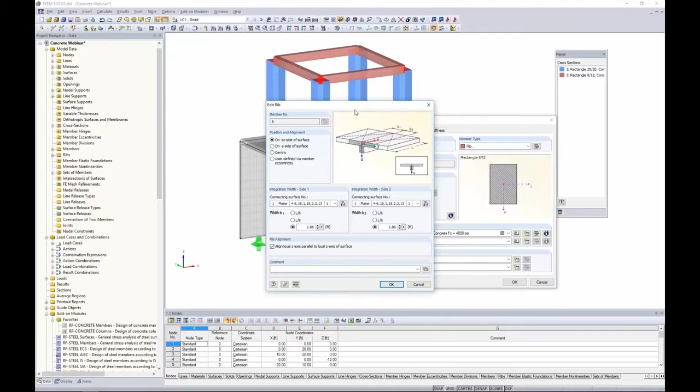And what's nice about the rib is that if we go into the Edit Member Types dialog, we can define where to exactly place the orientation of this rib in comparison to the surface it's related to, so we don't have to manually put in rigid links to drop it down below the surface. The program will automatically calculate that for us.

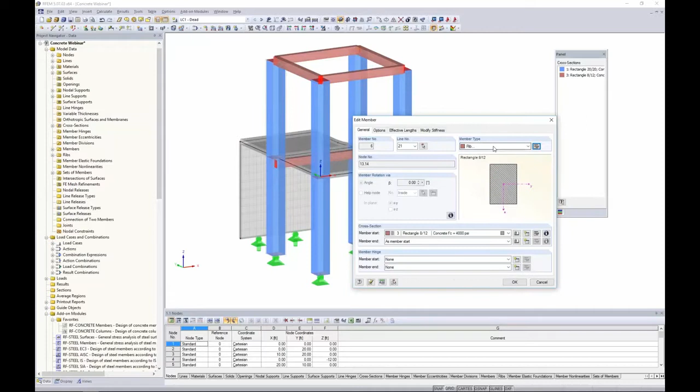Now what we can also do is automatically set the effective widths: L over 6, L over 8, or we can enter a user-defined option. So it's nice that the program has this member type as a rib, which is used quite often for concrete members.

You can see here that I've already defined all of this criteria. The last thing to notice about these members is that if I take a look at these columns, for instance, I right-click and go to Edit Member. Under the Modify Stiffness tab, this is something that needs to be done for concrete members. Typically the default will look like this, definition type none. What you want to do when designing according to ACI is select the drop-down according to ACI 318-14.

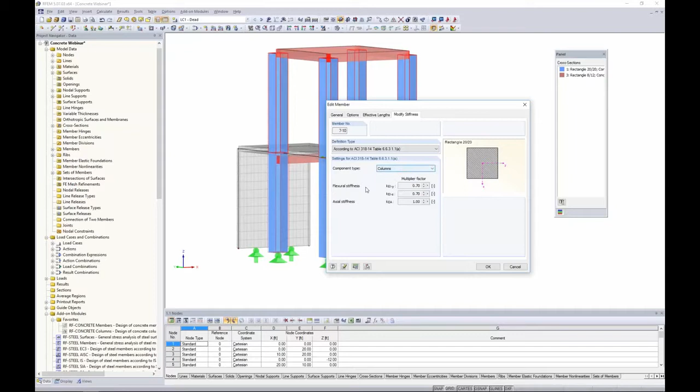If you click on this, it should look familiar. We have our component types: columns, walls, beams, and flat plates. Then you'll see these multiplication factors for our stiffness to take into account cracked cross sections. Anyone who's done concrete design is familiar with this. This is the way to take it into account in the program.

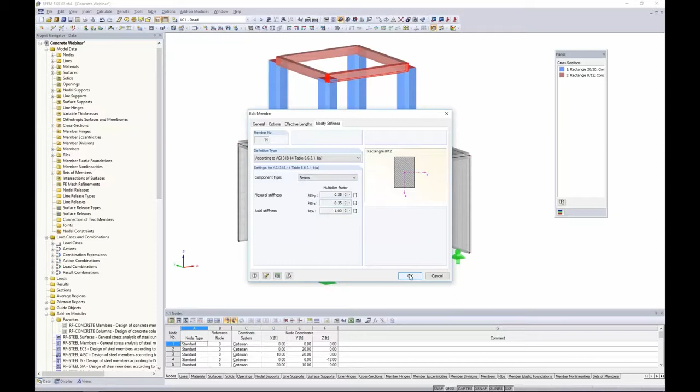For our beams, for example, we have the exact same setting according to ACI, but I've selected beams here. This multiplication factor will be slightly different than what it is for columns, which is why we give you this other drop-down box to define the element. So remember to do so for your concrete design. This isn't done in one of the modules, it's actually done in RFEM.

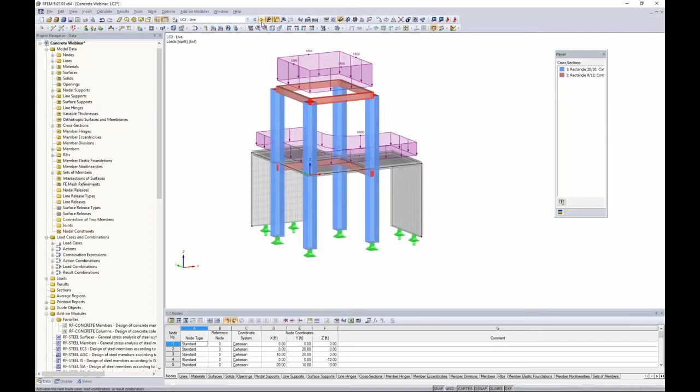The other thing to notice is that I went ahead and applied some loads already. We have our typical dead load, surface load here. I put some line loads at the top members, same thing for live load. Lastly, I put in a lateral wind load, applied as a line load to what we can call our first level diaphragm, as well as our second level, on these beams.

We can also take a look at our different load combinations that were generated. If we go into the Load Cases and Combinations dialog box, we'll see our different load cases: dead load, live load, wind load. More importantly, we're interested in these load combinations, which were generated according to ASCE 7. We have all of our LRFD load equations listed here, applicable only to those load cases we defined, and we also have our ASD load combinations listed.

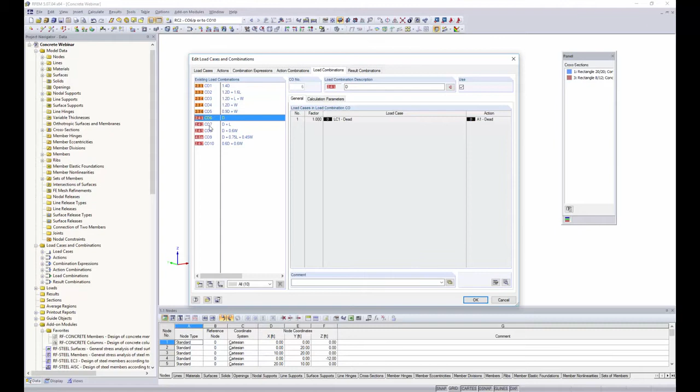Something to note: it is default in RFEM to run these load combinations as second order analysis, or P-delta. You can individually change these to something such as linear analysis or large deformation analysis if you have things such as cables. But for now we want to keep it as P-delta effect so that we are doing our member design according to P-delta. We also have the results combination.

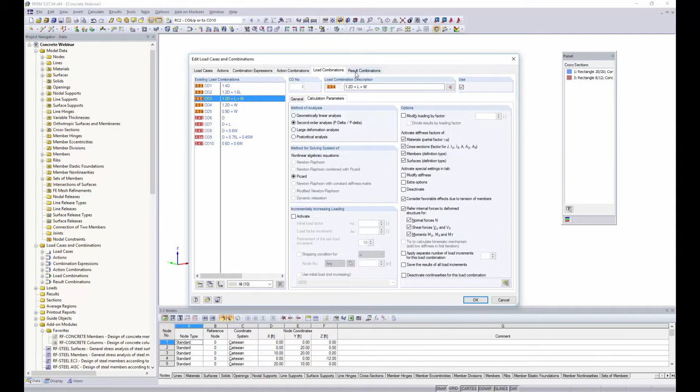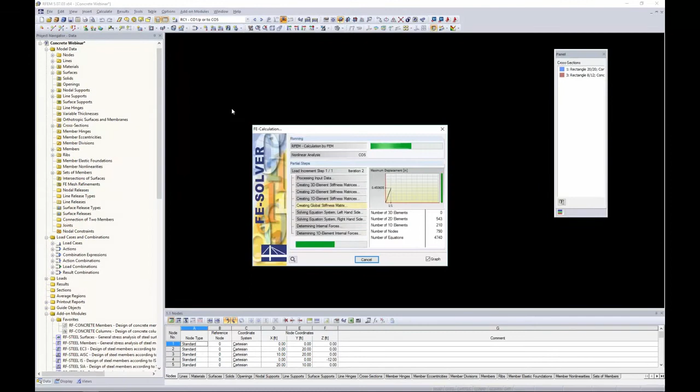This is nothing more than an envelope solution. You can see that we have the envelope solution for all of our LRFD equations and the envelope solution for our ASD equations. With that said, we can go ahead and run our first analysis with result combination 1. You'll notice this is nonlinear analysis, as I was saying, it's P-delta. It solves rather quickly, and we are given the envelope solution for all of our LRFD equations.

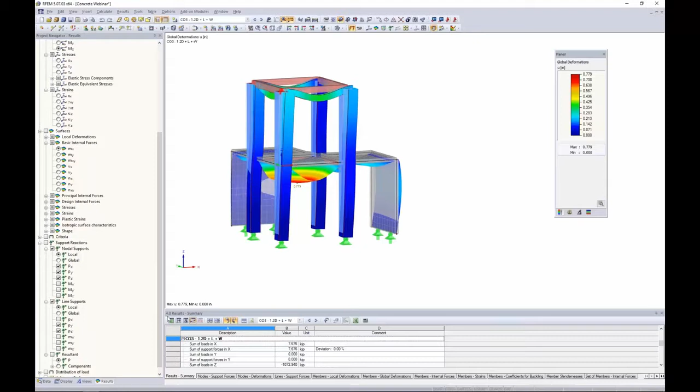Our results tab popped up here. This allows us to view our members, and I can turn this into wireframe mode to see our member internal forces, such as normal forces for our columns, or maybe shear forces and moments. We can always increase this diagram to make it a little more visible, and you can print this off. So everything according to our analysis is complete.

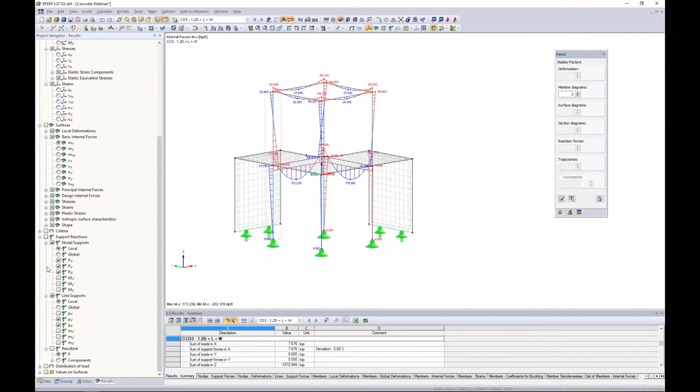Support reactions is something else that I mentioned you can easily show. I just have some simple pin conditions, and some pinned conditions at the bottom of our walls as line supports as well.

So that's basically the extent of RFEM. Now for concrete design, this is where our add-on modules come into play.

The first way to access these add-on modules, there's a tab up here called add-on modules. The options are a little bit more clear here in this list. Steel are grouped together, concrete are grouped together. So I could certainly access them through here.

Back on our project navigator, on the data tab down here at the bottom, this is our long list of add-on modules. You can always right-click and add it to your favorites to move it up to the top of this list. I prefer to access it through here only because it's a little bit quicker than going to that drop-down, but it's completely up to you.

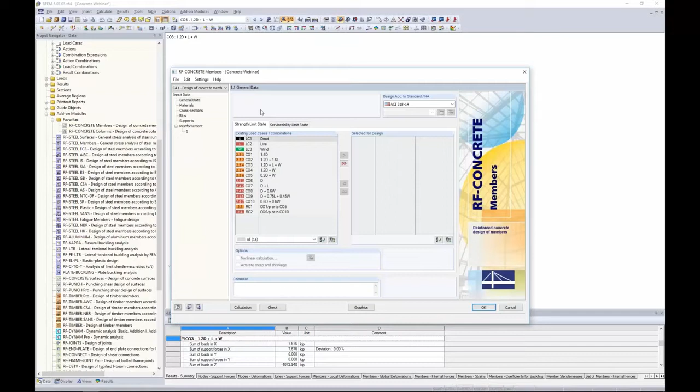So the first thing that we want to do is jump into our RF Concrete Members. Something to note here, this is our add-on module.

And when I say add-on module, avid RFEM users are used to this dialog box, but for others who aren't familiar with our program, this is just a simple dialog box within RFEM. All of the materials, the cross-sections, the loading, everything is taken from RFEM into this dialog box or add-on module, so you don't have to worry about redefining any of that information. The add-on module is purely used for code design.

You can see here that we have design according to ACI 318-2014 selected. Now the first thing the program asks us is what load combinations do we want to select for our strength limit state.

We will probably use our LRFD equations for this scenario. That's pretty common. Now for serviceability options, we will choose our ASD load combinations. That's typical as well for crack widths, and for deflections we want to choose our ASD load combinations.

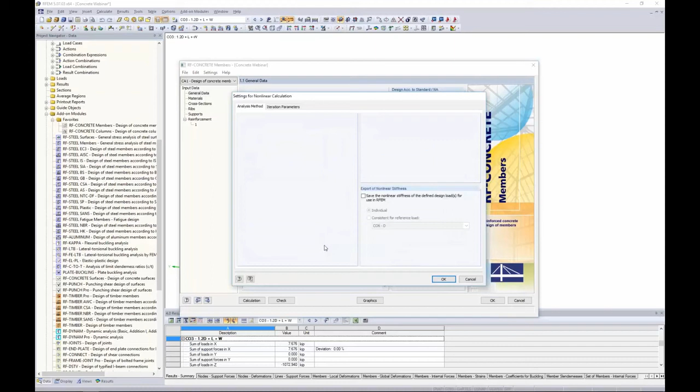Down here under our serviceability, we have nonlinear calculations. This is if you want to take into account creep and shrinkage. I'm not going to get into this today, but this does require an additional add-on module, Concrete Nonlinear. So if you want to take into account cracked sections with creep and shrinkage, this is certainly an option here, but I won't be getting into this today. We will just be sticking with the typical linear elastic analysis.

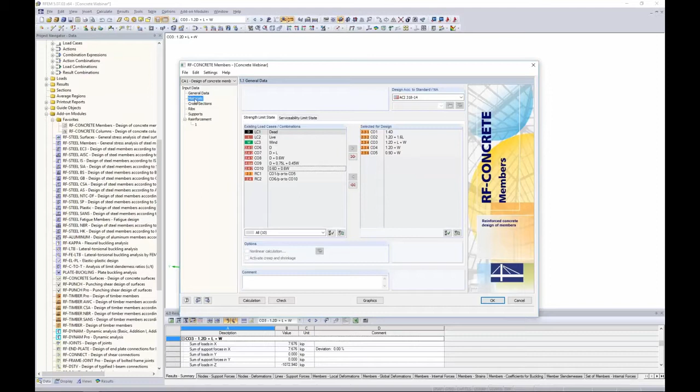Materials: as I mentioned, our 4000 psi f'c will be taken from RFEM. We have reinforcing steel grade 60. You can view the diagrams here for stress-strain for both our concrete and our steel. All of the parameters are given here.

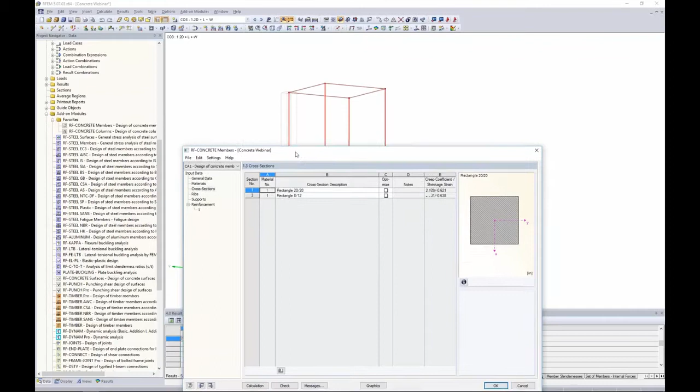Cross sections: we have the cross sections taken from RFEM. Let me exit out of this and turn this back into the rendered mode. Going back into the dialog box, I just wanted to show you that under our cross sections, it's nice because as we click on these different table rows, the members that are applicable to this particular row will highlight in the RFEM model. So everything is synced together.

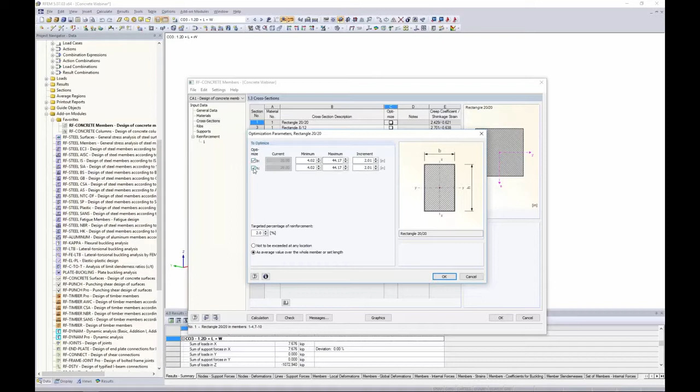We do have the option to optimize. If this is something you want to consider to get the best design, the most economic design, all you need to do is check this checkbox. You can see that we have the option here to optimize. You can set target ranges for your width and your height, B and H. You can also set a target percentage of reinforcement.

Sorry, I'm just double checking one other thing.

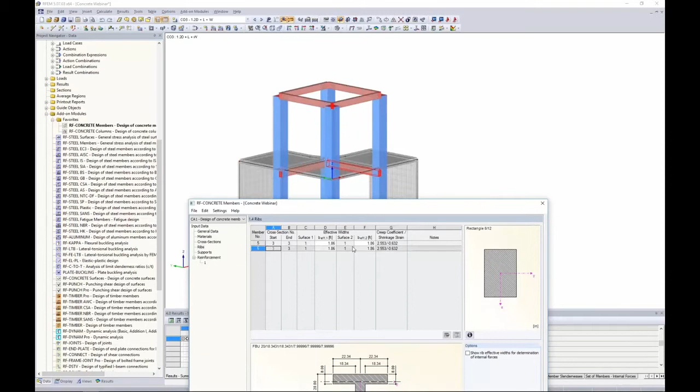Okay, now moving on down the list, we have our ribs cross section. This is the ribs category. You'll notice it highlights as I scroll through these different members back in RFEM. This is the ribs that we defined at the beginning in RFEM that I was showing you. The effective width is taken into account, how we set it in RFEM. You can always override this directly in the add-on module as well.

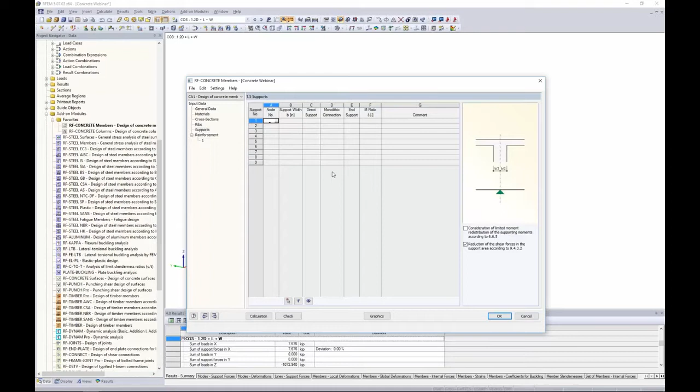Supports is something important because in the code, when we're doing something like shear design for example, the code says you can take the required shear force a distance of d away from the face of the support. Now in RFEM, and this is true for any finite element analysis program, members are just 1D member elements. They're modeled by their center lines. So we have no idea what the face of the support is.

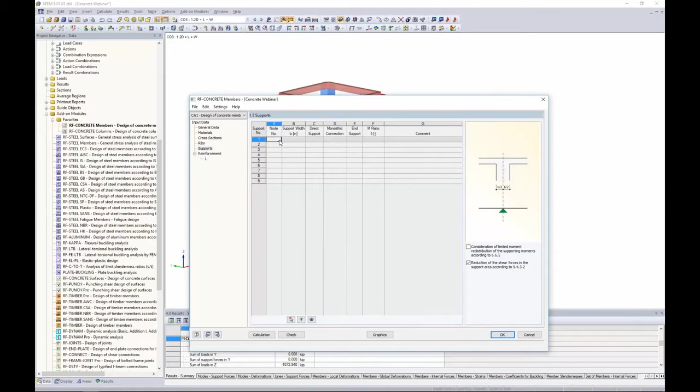And what's great about this add-on module is that instead of maybe over-designing for a shear force that is much too high, we can specify these particular supports. All that I need to do is maybe start with these nodes up here, and I just highlight. You'll notice these 4 nodes are now highlighted in red. I click OK, and they're all available in this list here. Take note of this picture.

As I change things within this table, this picture will automatically update. So, support width—our columns have a width of 20 inches, so I'm going to set my support width to 20 inches. For avid RFEM users, you may not be aware of this, but if you press the F8 button, it will quickly fill in these cells according to what was previously entered.

Direct support—this is self-explanatory just by looking at this picture. If I unselect this checkbox, this shows me that the beam is framing directly into that support. If I check it, it looks like it is a continuous beam resting on top of that support. For our case, we'll keep this as a direct support. Monolithic connection—is it one concrete pour or two? Again, shown by this picture.

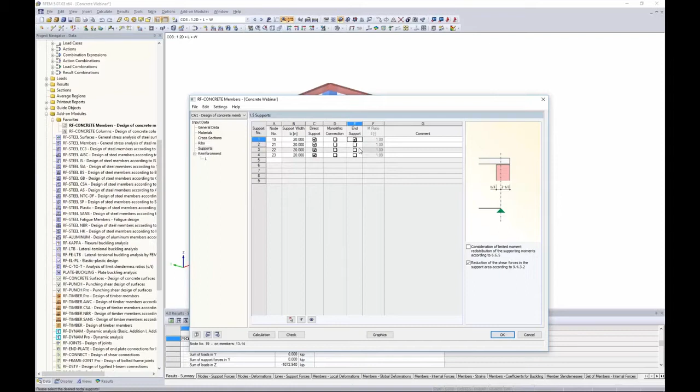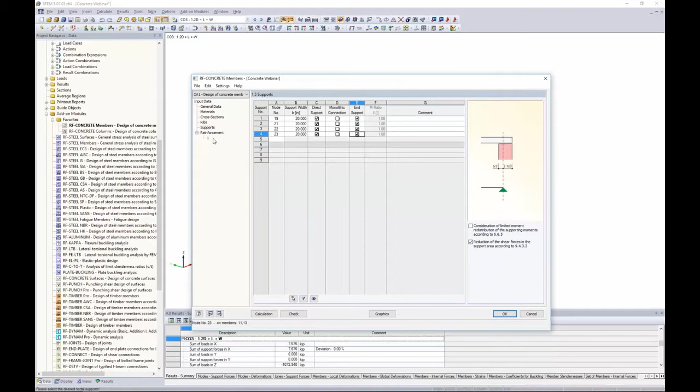End support—is the beam continuous over the top of the support, or is this an end support condition? For our options, our supports are an end support, and you'll notice the red arrow points to which node number I'm looking at. Again, this is great for large models—I don't have to guess, oh, I don't remember what node 23 is, go back into RFEM. Everything is synced together. So now we jump into reinforcement.

This is a little bit more lengthy than the other options we've seen so far because we have a lot of code references and things to take into account according to the ACI for reinforcement design. The first thing the program asks us is if we want to define more than one reinforcement group. This is important if you have a lot of members, since of course they're not going to have the same reinforcement layout. So you can create as many groups as you'd like and give them different description names. For us, we just have one description that we'll define here.

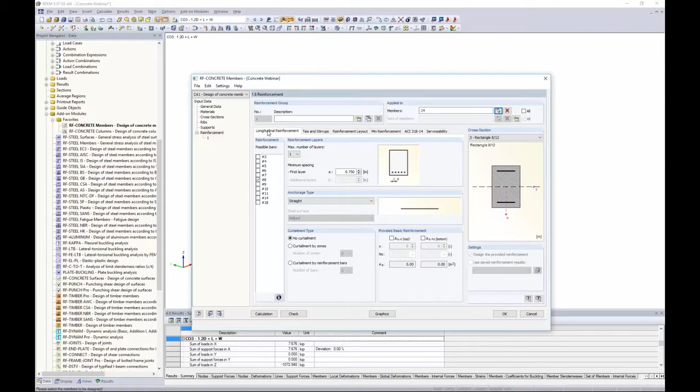Applied to which member—if you have many different reinforcement groups, you can apply them to different members. For the purpose of this demonstration, I'm just going to select one member for design. Then we jump down to our first tab, longitudinal reinforcement. What bars are possible for our reinforcement design? Let's say I want to choose maybe 5, 6, and 7 here. I'm not really sure exactly what will be needed, but we'll start with something like that.

Max number of layers—this is pretty self-explanatory. If I want more than one layer, as you can see here, it's possible. Probably more important for larger beams when you're taking on larger loads. For our case, we will just have one layer.

Something else I'd like to point out is the minimum spacing for the first layer. We have a user-defined entry here, so we can refer back to the code—this is chapter 25. The minimum spacing for our longitudinal reinforcement must be the greater of the values of 1 inch, the diameter of the bar, or 4/3 times the diameter of the aggregate. I have no idea what the diameter of the aggregate is—probably as an engineer you might know that information, so you'd want to take that into consideration, but we do not have an entry for that in the program. One inch will probably be controlling here because I do have smaller bar sizes under a 1 inch diameter.

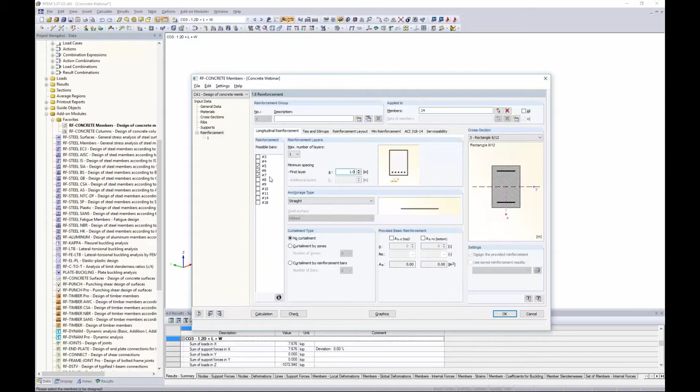Anchorage type—so anchorage and curtailment, I'll talk about in more detail here. The anchorage type—we have every different option you could probably consider, and it's updated with this picture. You'll notice we can take into account transverse bars, or maybe we just want a typical hook. For us, we'll keep this as straight. Steel surface is grayed out because the code does call that all steel surfaces must be ribbed.

Curtailment type—curtailment is something that maybe some of us aren't familiar with the term, others may be. So with that, I'm going to jump to my PowerPoint here and discuss what curtailment is, and a little bit more about our anchorage development lengths.

Curtailment is where we can reduce the area of our flexural reinforcement along the length of our beam because we have a lower bending moment there. What this means is that this is going to save us materials and in turn save us money. It is an option in the program to take into account, and I'll show you in just a minute how to do that.

So the other entry we need to consider that RFEM is doing in the background is the development length. The program knows whether the bars are in tension, compression, or if they're a standard hook in tension, and it will refer to code chapter 25 for all of these varying equations to make sure that these development lengths are correctly taken into account.

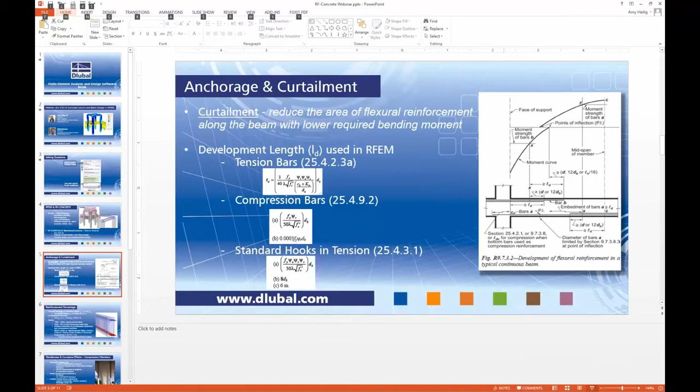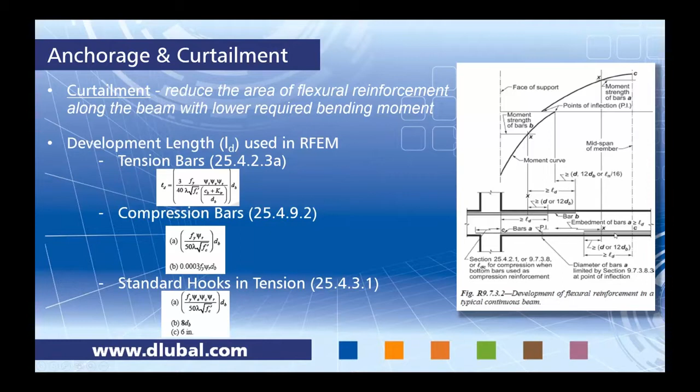And back in the PowerPoint, this is just taken directly from the code, figure 9.7.3.2, and this is exactly what we're talking about. Probably towards the face of a column, we have more of a negative moment here. We have a very low moment in between here, so maybe we don't need as much reinforcement. This would be a situation where curtailment could be used, and then obviously we're getting into higher positive moments towards the middle span of the beam, which will require reinforcement on our bottom. Okay, for our case, we'll just leave it to no curtailment.

Provided basic reinforcement. This is great for structures that are already existing. Maybe you already know the top and bottom area of steel. Here you can actually set that by just defining your number of bars and the bar diameter, and the program will automatically consider this as provided basic reinforcement. If this reinforcement does not meet the needs of what the design is calling for according to the ACI, the program will tell you, well, okay, we are considering this provided basic reinforcement, but we also need to add additional bars in order to meet the requirements of our bending moments.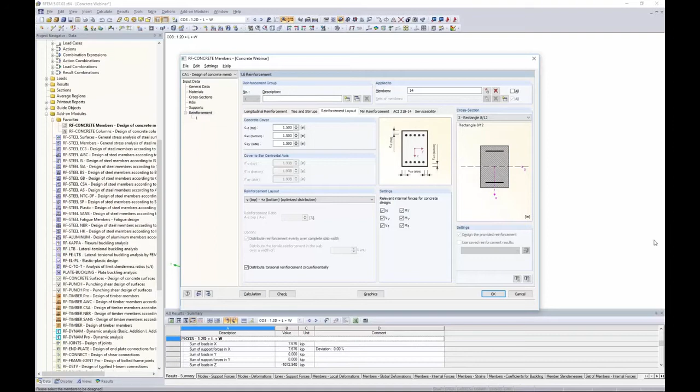Reinforcement layout, concrete cover. This just comes from Chapter 20, Table 20.6131. We can consider our concrete cover here. Keep in mind that as I scroll through these, you'll notice that this picture is synced up, so it's kind of nice that you know exactly what you're looking at.

This is clear cover, the distance from the edge of the concrete to the edge of the reinforcement. Shear ties are considered in this as well. This is why the cover to the centroidal axis is grayed out, because as I adjust this to maybe 2 inches, the cover to the centroidal axis will be adjusted as well based on what we put in there for possible bar size.

Reinforcement layout. This is just how you want the layout for your top versus your bottom longitudinal reinforcement. Do we want it optimally distributed? Maybe we want a symmetrical distribution so that the top is the same as the bottom. We also have options to define the spacing or layout based on ratios of our top steel area over our total steel area, or we can define it as bundled bars in the corners and uniformly surrounding, which is more typical for columns. For us, we will keep it as optimal distribution for our longitudinal reinforcement.

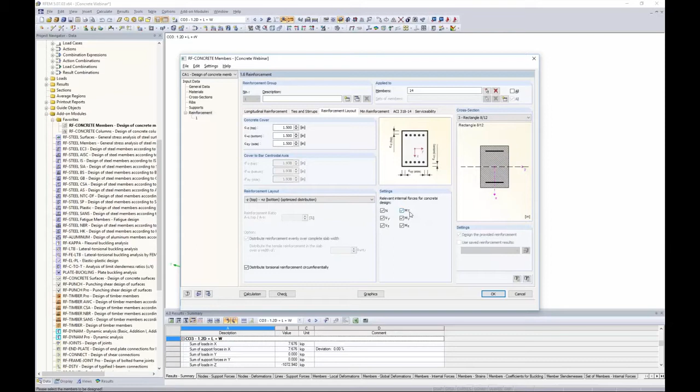Settings. These are the internal forces that the program is designing for. We get asked quite often, do we design according to torsion? Yes, we do. You can see here we take into account bending moment according to torsion. We also obviously design for our shear and moment as well as our axial forces.

Minimum reinforcement. We have the 2 check boxes here to take into account minimum longitudinal reinforcement according to the ACI, as well as the minimum shear reinforcement according to the ACI. If you have a user-defined minimum reinforcement, you just click on this little button. You can define the number of bars, the bar number, and the program will take that into account as well.

Secondary reinforcement is for any reinforcement beyond what is required structurally. So if you are looking to put in a little bit more reinforcement than what is required, this is where that will be done, under the secondary reinforcement option here.

ACI 318-14, percentages of reinforcement. You can see the default is set at 8% here.

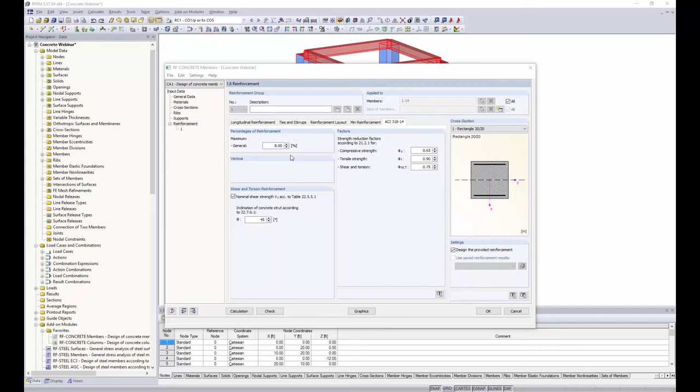So this is something I'd like to go into a little bit more detail. We'll jump back to our PowerPoint here. The code tells us that for flexural members and members where our axial load is less than 10% of the concrete strength times the gross area of the concrete, our net tensile strain must be greater than or equal to 0.004. This comes directly from the code, Chapter 9, Section 331.

Now, compression members or columns, we actually are given a reinforcement percentage. So our steel area must be greater than 1% of the total area, but less than 8% of the total area. This is explained further in Chapter 10, Section 611.

A little bit of history about this. From 1963 to 2002, reinforcement ratios were used despite it being a compression member or a flexural member. We always use these ratios that you're used to down here for columns. Then in 2002, the ACI introduced strain limits, which is now what you're seeing according to Chapter 9.331 up here. The purpose of this was to achieve uniformity with pre-stress, with reinforced, and with compression members.

I actually pulled all of this information from the journal called Case Studies in Structural Engineering. There's an article in there, Strain Limits versus Reinforcement Ratio Limits. What's interesting is that if you're an engineer used to these reinforcement ratios pre-2002, and net tensile strain isn't very intuitive to you, the professor has actually converted these stress equations back into ratios. What he found was that there really was no difference. When we convert them back to ratios as a percentage of the gross area of concrete, it comes close to the net tensile strain being greater than or equal to 0.004. So something worth checking out if you are interested.

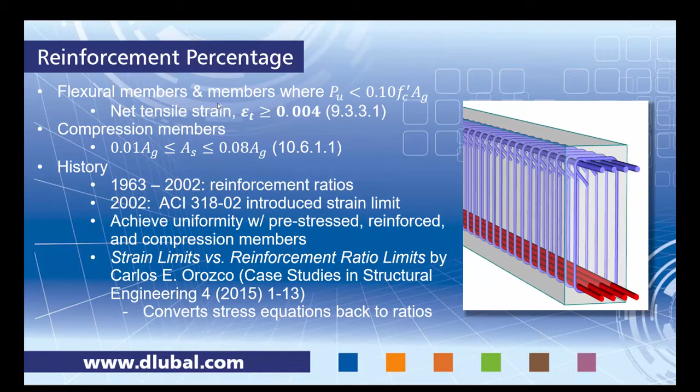With that, we can jump back to RFEM. Here, we do have this set at 8%, but keep in mind, according to the code, for our flexural members we need to check our tensile strain after our analysis, because realistically this is irrelevant if we are not meeting the code requirements for the tensile strain.

Shear and torsion reinforcement: we have our nominal shear strength according to Table 22.551 in the code. Then inclination of concrete strut, which is related to our torsion. The default is 45 degrees. You can certainly put in another angle, and for more information on this, it's probably best to refer to the code, Chapter 22.

Factors. Pretty self-explanatory here. If you've done concrete design, we're all familiar with our strength reduction factors. It is in Chapter 21 of the code. These right now are set to what the code calls for.

However, you certainly can change those if you choose to do so. But keep in mind, if you are doing design according to the ACI, then you will be following the code for these entries.

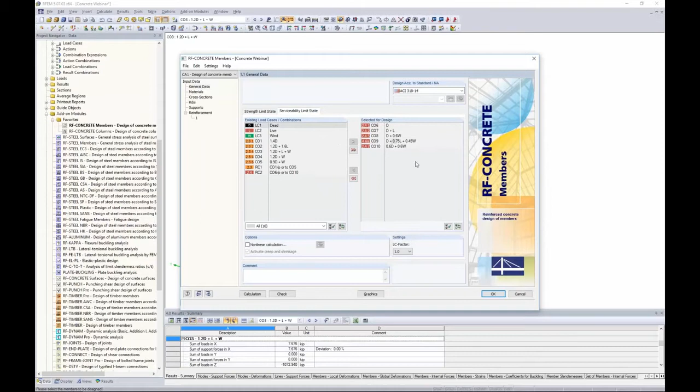This serviceability tab is only available because, back in the General Data tab, we defined our ASD load combinations for serviceability. If I defined no load combinations here, I would not have this serviceability option. So if that's missing, it's probably because you didn't define any serviceability load combinations.

Crack analysis. We have the options here to limit the value for allowable crack width based on a couple of criteria. The first option is limit values, and in this drop-down box, the ACI did studies on various exposure conditions and came up with a limiting crack width that approximates what the max crack width should be. For example, if you're in a water retaining structure, your crack width is much smaller than if you're in dry air. For us, maybe we'll stick to something like humidity—the structure is maybe down south where it's quite humid. Same for the bottom. So our crack allowable width is 0.012.

You also have the option under user defined to just type in whatever you'd like. But we do need to give it some type of limit so that the program knows to flag it if we are over those limits.

So how exactly do we determine what the crack width is? What's interesting is the ACI does not give you an exact equation for how to calculate crack width. Basically in chapter 24, it tells you to limit the longitudinal spacing so that you can decrease your crack width, and that comes from this section in the ACI.

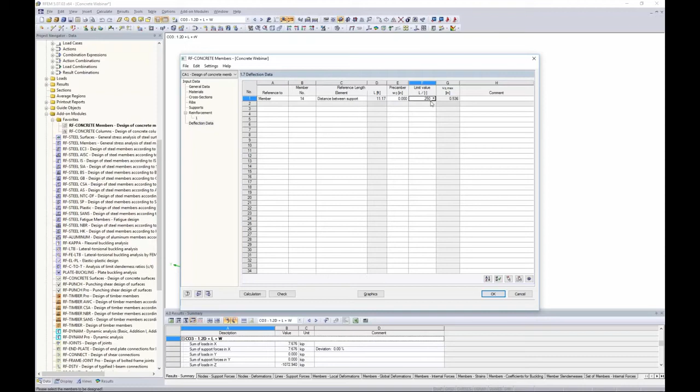Back here under serviceability, we also have the option to activate long-term deflection according to 24.2.4.1. This is just a table in the code that will take into account in the calculations for deflection the duration of the load, and we can set the number of months here.

So with that said, I think we are finally ready to run an analysis. Now, all I need to do is click calculation in this add-on module, and what it's giving me now is reinforcement design according to ACI. You'll see that now all of this results section is available here.

The first thing to look at is our required reinforcement. In this table, we will see basically the summary according to cross sections, or maybe we want to view it by member. Because we only defined one member here, we're still just looking at member number 14, so it doesn't matter—we're getting basically a summary of our reinforcement. So we have our reinforcement at the top given, our longitudinal reinforcement at the bottom, and then we have the reinforcement for required longitudinal torsion.

And you'll notice this is set to 0. So this is only applicable if we have some torsion within this beam.

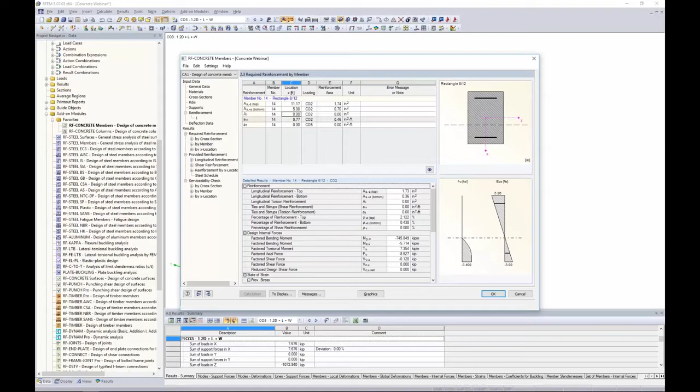Then we have our shear reinforcement, and lastly our stirrup reinforcement for torsional moment. Again, this is zero because we don't have much torsion in this particular beam.

As I click through these different options, my stress strain diagrams are updating here according to my cross section. And this is also something else that I really want to emphasize.

There are a lot of other programs out there where you simply don't know where your numbers are coming from. I really think RFEM is such a strong and powerful program because we always try to give you as much information as possible. I've mentioned this before, but this allows for very few tech support calls and emails saying they don't understand where these numbers are coming from, because we list all variables here. We give code references where we can, so you can really understand where those numbers come from.

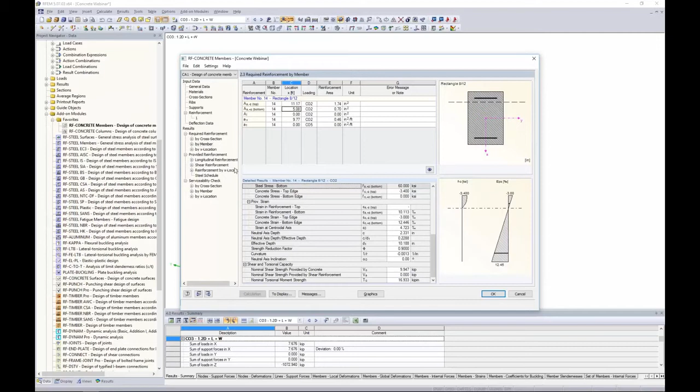We can also view the required reinforcement by X location. What's nice is that as I'm scrolling down through these different options, you'll notice this red arrow is updating depending on where I'm at along the length of the beam. So for large models, this is beneficial so you can really understand what exactly you're looking at.

And again, we have the long list here that updates as we scroll through these different options to show all of our variables and how we came up exactly with these numbers.

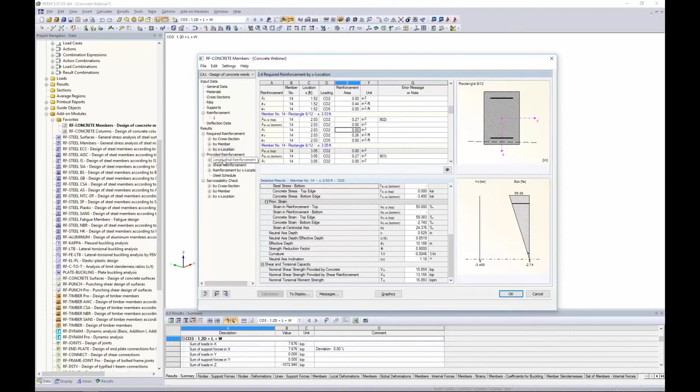So now that we know our required reinforcement, obviously the program needs to come out and give us some sort of design, and that's where this provided reinforcement comes into play. The first tab here is our longitudinal reinforcement. So in order to meet the required reinforcement, the program has set 3 number 7s at the top here and 3 number 5s at the bottom to meet those requirements.

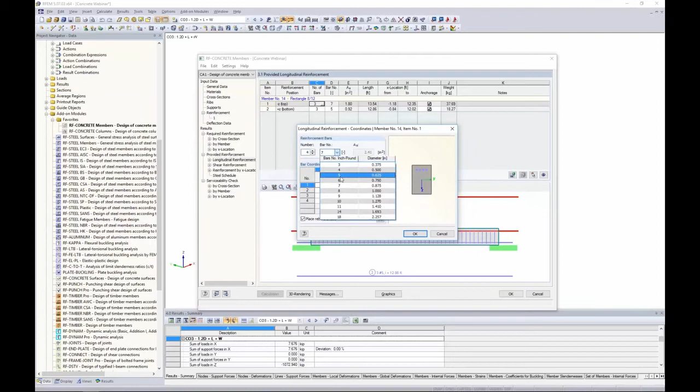What's nice too is that if you take a look at this and think, I'd really prefer not to use number 7 now, I can easily click in this table here. I can increase to 4 number bars, and I would like to use number 6s. I click OK, I can click on any one of these other tabs, and the program says wait a second, you changed your values for your number of bars and the bar size, I need to recalculate. So you quickly recalculate, and the program will update only what's applicable to the changes you just made. So a very quick and efficient way, rather than jumping back into this reinforcement, to force the bars the way that you would like them.

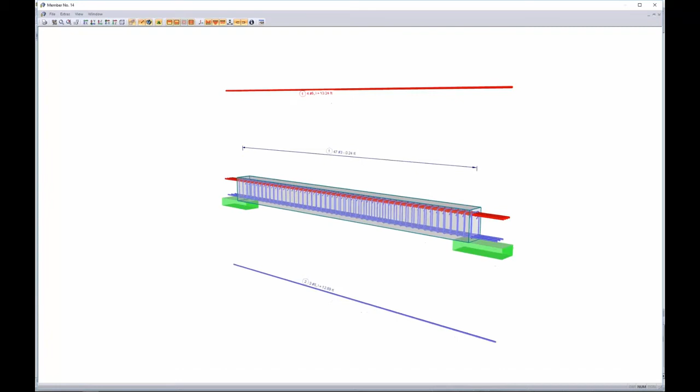What's also interesting here is we get this nice picture, but if I double click in it, I get basically the 3D layout of my reinforcement. You can see here that I have my longitudinal reinforcement shown, I have my shear reinforcement, and it even shows the development of my shear reinforcement as well. I'm given the callouts for the bar sizes as well as the number and the spacings.

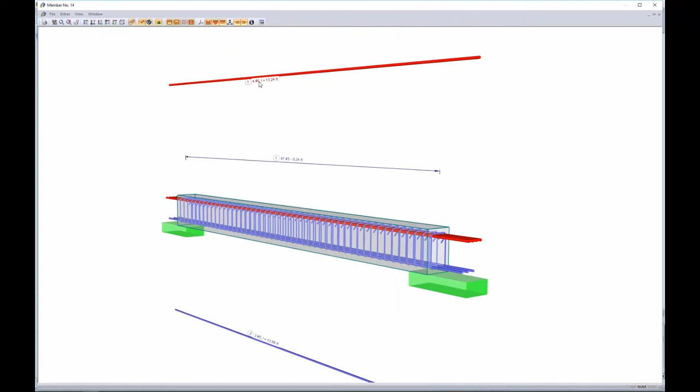I have control here to turn on and off any of these reinforcement bars, and this is great for printing purposes. And just like in the tables, if I think, oh shoot, never mind, I want to go back to 3 number 7s, I can just double click in here and I'm given those exact same options that you just saw in the table. So again, this is a great and efficient way to quickly make changes.

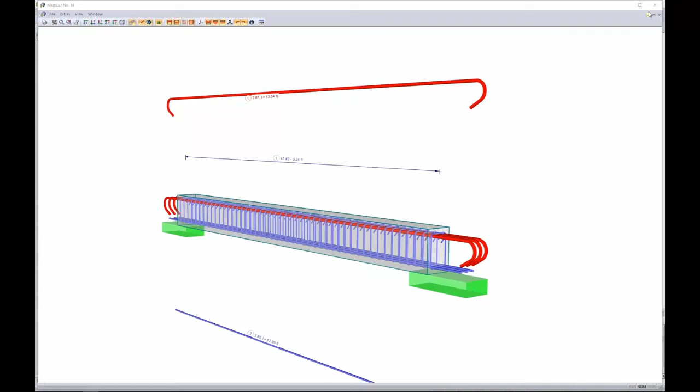Maybe the anchorage type I decided needs to be a hook instead of straight. I click OK, everything is automatically updated. So I click out of this picture, maybe I click on another tab, the program says, hey, you made changes, let's recalculate. I recalculate, it recalculates only those bars that had changes so that everything is updated in our results here.

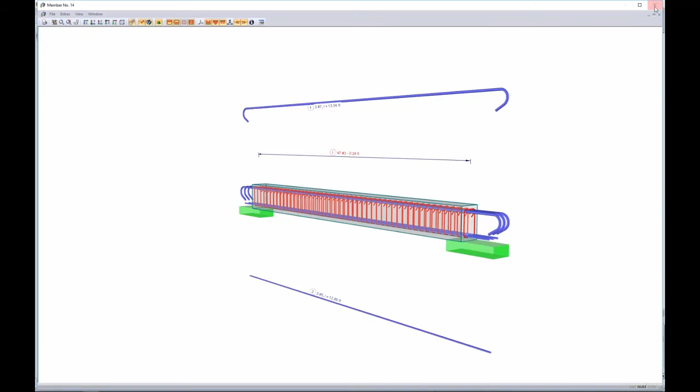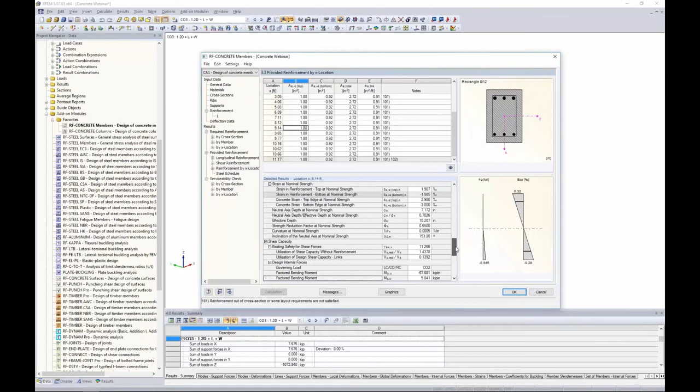Reinforcement by X location, basically just a summary here along the length of the beam. Again, this nice red arrow shows us where we're at. We get a summary of our top and bottom longitudinal reinforcement as well as our shear reinforcement. And then, as I always like to mention, here is our list of any variables and equations that went into calculating this reinforcement.

Lastly, we have a steel schedule. This is your material takeoffs, which a lot of us, of course, are interested in the total steel.

Serviceability check. This just relates back to the crack widths and deflections. You can see that according to the deflections, we have a ratio of 0.73, so we are under those limitations that we did give it under the deflection data back here.

Now we have our spacing limitations, which I mentioned the code calls out for cracking. And we also have the ratio according to the Gergely-Lutz equation, calculated in comparison to the limiting crack widths that we also gave it in this criteria.

So we can view it by cross-section or by member. Again, same scenario since we're only doing one design here, and of course by X location.

Something else to notice in any of these tabs, you'll notice this notes section. If you see any numbers here and click on this messages, it should correlate to any warnings or just information that the program would like to give you about your reinforcement design. For example, this says 334, the effect of the bending moment MZ is not considered in the given deflections. So this is important, if you are seeing those numbers, to just quickly take a look at the messages.

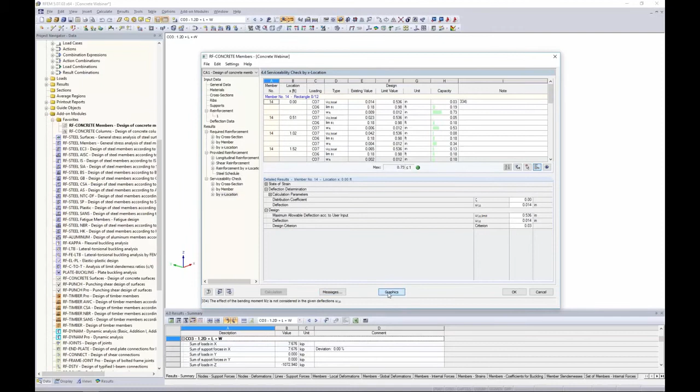The other thing that we can do is view everything graphically here. Once I click graphics, you'll notice in my drop-down box I have another option called RF concrete members. Now in my results tab, I no longer have all of the internal forces from RFEM. I can easily jump back to those, but now I'm looking at the results from my concrete module.

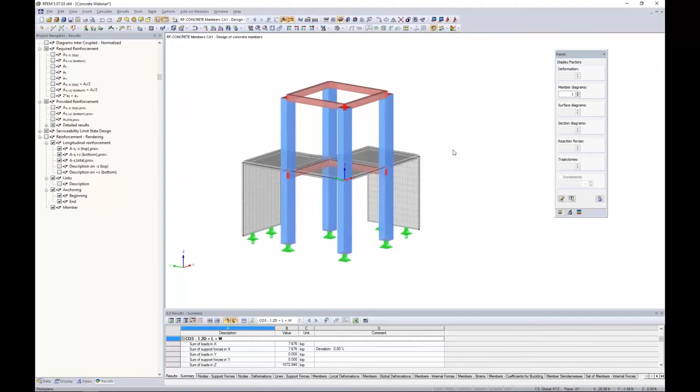I can turn this back into wireframe. Maybe we want to take a look at our top and bottom reinforcement. This is nice, maybe we want to add this to some pictures, and you have all of these options to view this graphically as well. Sometimes this makes a little bit more sense than viewing things over and over again in a table just to reiterate what exactly is going on.

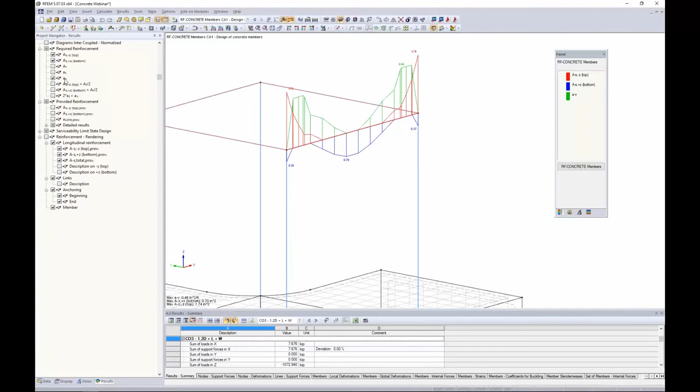You can see here shear reinforcement, and you can even show that nice rendering picture that we were viewing directly in the model. Again, maybe good for printing purposes, just to show you how things are related here to the rest of the model.

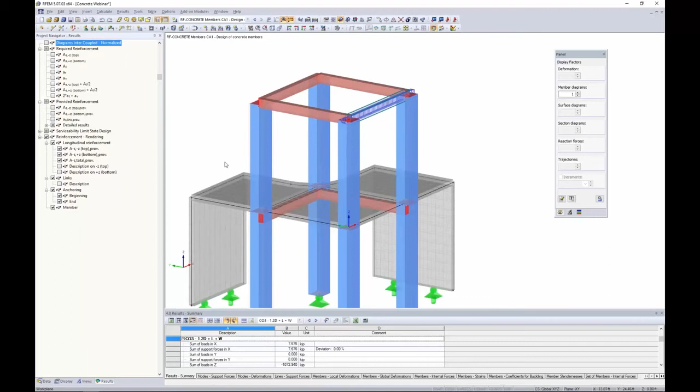So with that said, that basically sums up our beam design. Now we want to jump into our column design. And before I do that, I want to go back to the PowerPoint because this is something that is very important in regards to column design.

We often get asked, do you design columns according to the moment magnification procedure or second order analysis? This is where I really want to clear up what's going on in our add-on modules. The code in ACI 2014 says that we have 4 different options to account for slenderness and curvature effects for our compression or column members. The first is a first order analysis according to section 6.6. This is purely a linear first order analysis.

Now, second order effects are taken into account with our moment magnification procedure. Those of you who've done column design are probably very familiar with this procedure. Basically, it will just increase our moments to account for those second order effects.

What's great about the moment magnification procedure is that you, as the engineer, can easily cross-check these numbers in comparison to the software. When we're getting into a little bit more complicated analysis, it's not that easy to cross-check by hand calcs, but with this option, we certainly can do so.

First order analysis with moment magnification is taken into account in RF concrete columns. This is the module I will show you guys next. Again, to reiterate, first order analysis, RF concrete columns.

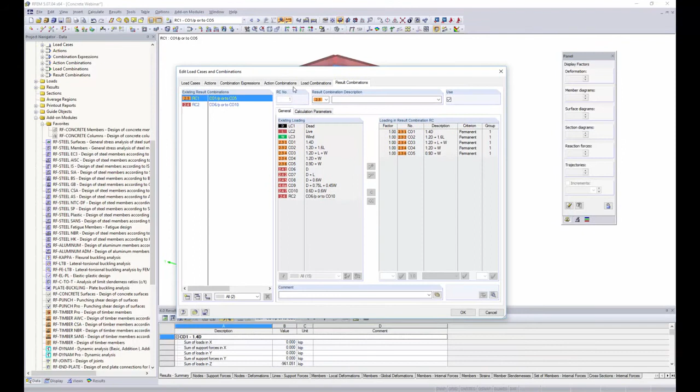Back in RFEM, not the add-on module, we want to go to our load combinations dialog box. As I previously showed you, all of these load combinations are according to second order analysis. What we actually want to do here is select all of our load combinations and choose geometrically linear analysis. This is important so that we don't account for second order effects in RFEM, then we go into our RF Concrete Columns and we again account for second order effects with moment magnification.

Now the program is smart enough to throw up a little warning saying, hey, you are accounting for second order effects twice. Realistically it's not that much of a difference if you choose to do so, but it will still warn you that you are accounting for them twice. So for the sake of this, to correctly take into account moment magnification, we want to change all of these load combinations to linear analysis.

Now, if you are jumping back and forth between beam and column design, maybe you want to make a copy of these load combinations, set half of them to linear analysis and set the second half to second order analysis. Then you can individually assign those load combinations in these separate add-on modules.

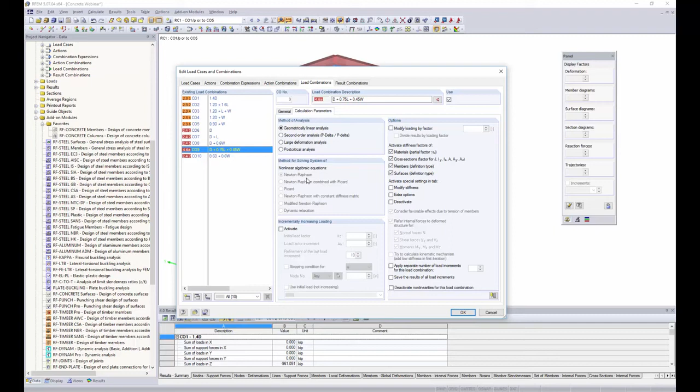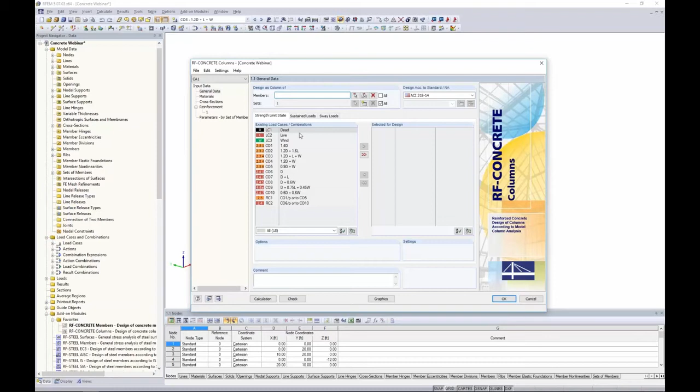So now that that is done, we can go into our concrete columns and take a look at our design loads here. Now all of these design loads are ready to go with linear analysis taken into consideration. This module looks very similar to what we were just in, but you'll notice we're in the concrete columns add-on module here. We need to define the members or the sets of members.

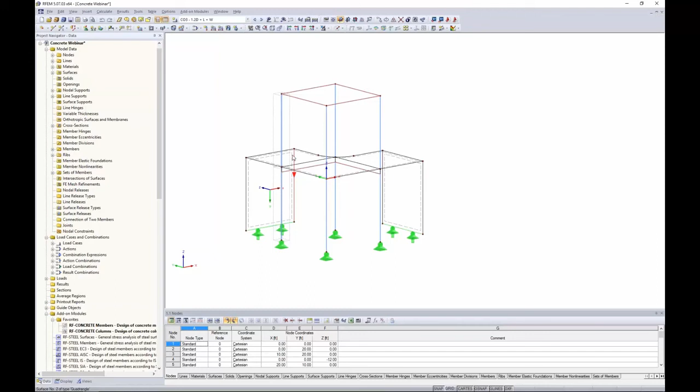If I go back to the model and turn this into wireframe, you'll notice these two columns here have this dotted line around them. This dotted line means that it's a set of members, and the reason why I did that is because we probably want to design these two columns to have the same reinforcement, maybe the same size, maybe they'll be cast as one continuous member - whatever it is, we probably want the same design for all of them. So all I need to do is right-click, select both of them, right-click, and here I can create a set of members. This is a continuous member now.

So when we're back in this add-on module, instead of designing each individual member, I have the option down here to design according to my member set. So I'm going to design according to this single member set here for the purpose of this example. Strength limit state - I am going to choose my LRFD equations here. And then we get into our sustain and sway loads.

This gets a little bit confusing because this is obviously very different than just our typical strength and our ASD load combinations for serviceability. So going back to the PowerPoint, I do expand on this a little bit further.

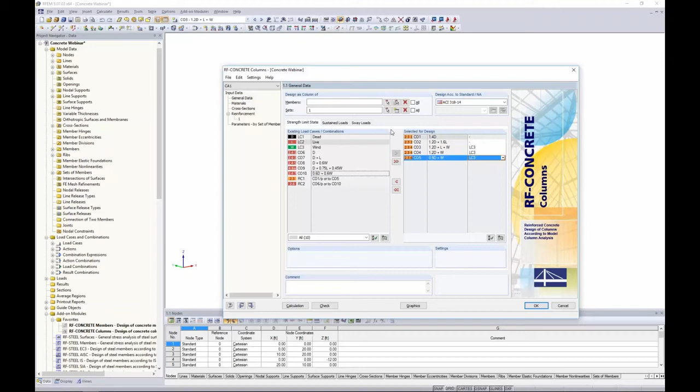This is very important to remember: back on the strength limit state, we now have this drop down available, and we need to choose which loads in this load combination are used for sway purposes. Here you can see I'm selecting load case 3 for wind, this is what I put under my sway loads, and it's now available in this drop down. So that's a little bit about why we have these different tabs - they really do affect the moment magnification procedure.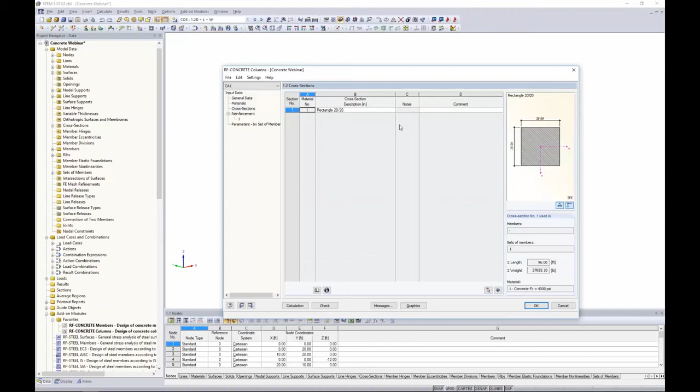Materials - again, a lot of this is just repeat information from the previous add-on module, so I'm not going to spend significant time. Materials is taken from RFEM, and we have our cross sections. You'll notice we don't have the option here to optimize, so just something to keep in mind within this concrete columns module. Then for reinforcement, we just choose the reinforcement type that we would like to consider.

The layout is typically uniformly surrounding for columns. Anchorage type, again we have straight, hook, bend. We also have the option to consider steel surface, such as zinc coated or epoxy coated. This will be added in our other add-on module fairly soon as well, because it does affect your development length.

Ties and stirrups, same concept as before - we'll select number 3 and number 4 to be considered. Secondary reinforcement, again, this is just any reinforcement beyond what is structurally needed. For us, we won't consider this.

Reinforcement layout - you have the option here to define your cover according to the centroidal axis or the edge of the rebar. I always like to choose the edge of the rebar, it just makes a little bit more sense to me. The centroidal axis will then be updated considering your shear reinforcement as well as half the diameter of the longitudinal reinforcement.

The program also asks us the bar number to be considered for preliminary design. Well, maybe I want to choose the most economical, number 4, for example.

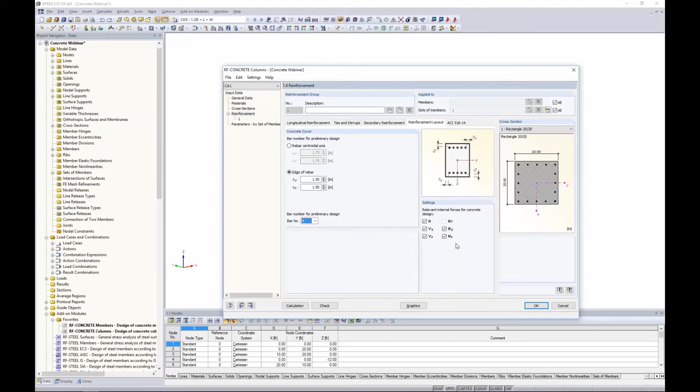Relevant internal forces for concrete design - you'll notice here we do not design for torsion within this add-on module. So if torsion is something you want to consider for your columns, you would need to do so in the concrete members with P-delta effects and that sort of application. In the code under the column sections in ACI, it really just says, hey, if you have torsion that exceeds a certain amount, refer back to the beams. So that's why we really don't have an option here to design for torsion, but it is possible in RFEM itself.

And lastly, ACI 318-14 - this is all the exact same stuff that we just saw previously, giving our longitudinal reinforcement minimums and maximums, our strength reduction factors according to the code, as well as our shear reinforcement. Notice that torsional reinforcement is not considered here.

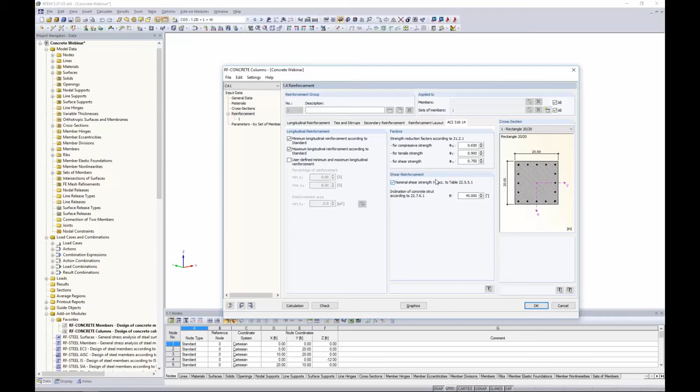Parameters is something that is lastly important for the moment magnification procedure as well. Here, if we want to consider buckling about our Y or Z axis, which is given here. And by the way, if you are not sure about your Y or Z axis, you can always right-click on your members and turn the local axis system on.

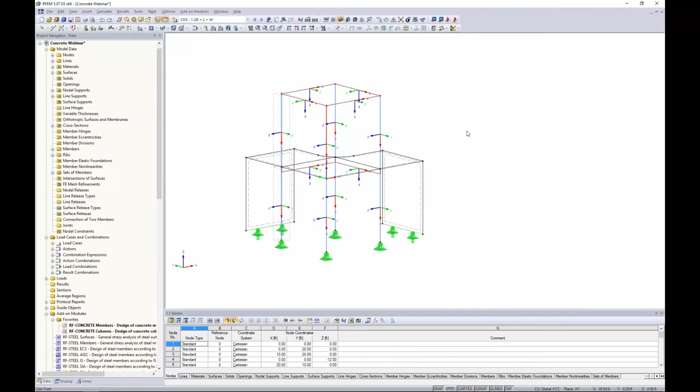So now we can see what direction is Z and Y. We can even turn this into a rendered view so that we can view, if we didn't have a square column, what exactly is going on with our local axes.

With our parameters here, we want to define if buckling is possible. Is it unbraced or braced? The program will automatically calculate these K factors according to the code. We have those different charts in the ACI that calculate these K factors, and the program takes all of those into account. Same thing with buckling about the Z-axis.

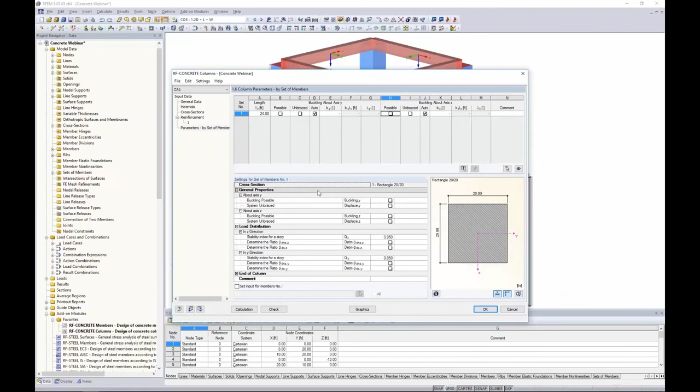For this option, I'll just leave this unchecked for now for simplicity. Again, all of our information is given here in the tables down below. So now we're simply ready to run a calculation.

This should be basically what you're used to seeing in the other add-on module, but now we have a set of members that we're designing for. The first thing that pops up with our results is our check, our set of members.

You'll see here that we have our design ratio, and we have the code reference immediately available here. This is really nice, so you know exactly what's controlling overall for this particular column design.

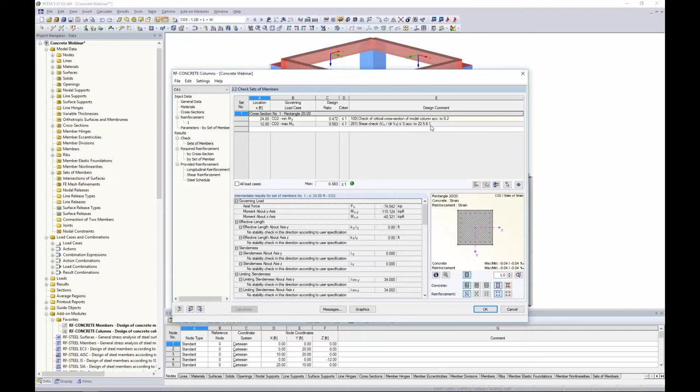Right now we have a check of the critical cross-section of the model according to 6.2. Our shear check is according to 22.5.6.1. We have our nice green smiley face because we are below 1.

As I always love to point out, everything is available here in our table, all variables that came into play with any of these checks and code references where they're applicable. So again, not a black box type program, but anything that you'd like to know how this came into account for the calculations, we try as best we can to put it into the program.

You also have these little pictures down here. We can view the stress diagram of the concrete. We can give it value. So if this is something you're interested in, this is available here.

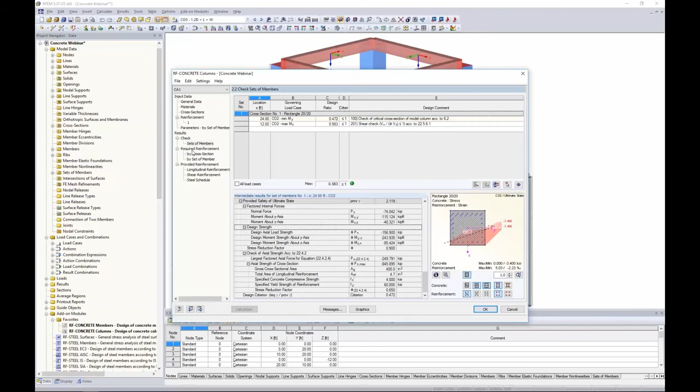Required reinforcement, this should look a little bit similar to our other add-on module. Obviously here we're only giving longitudinal and shear. We don't do torsion, we're just given the basic layout for those.

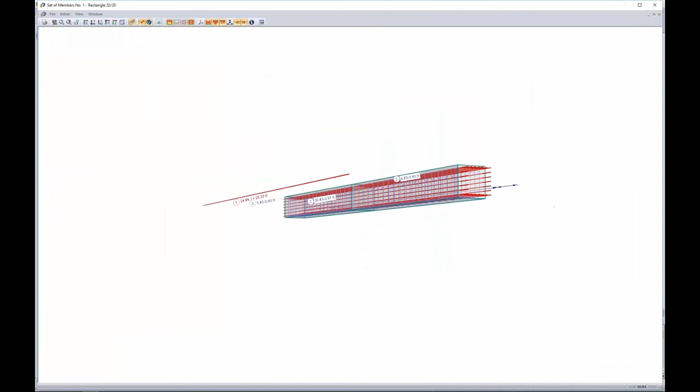And lastly, the provided reinforcement. This looks just like our picture for beams. We can double click and we're given a nice 3D rendering. Just like with the beams, we can double click on any of this reinforcement to quickly change it if we'd like to force it to be another size, another spacing, whatever else you please.

And we can view everything graphically. As I mentioned with the other add-on module, it's the same procedure here. So you can see there's really not a whole lot of differences between the members and columns add-on module.

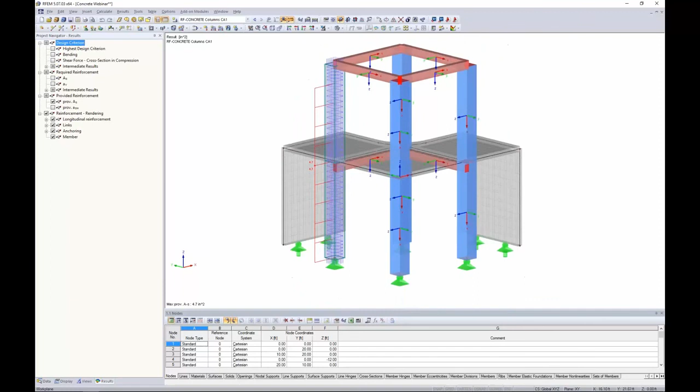It's nice. Once you get the hang of maybe beam design, you can also easily do your column design as well. But to emphasize again, it all just depends on how you want to do your column design. Is it according to moment magnification? Then you would want to use the concrete columns module. If you'd like to do it according to P-delta, then you would choose concrete members.

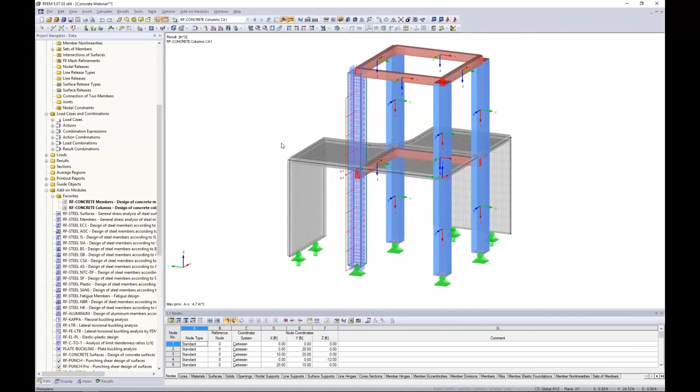So with that, that basically sums up the reinforcement design according to ACI for our beams and our columns.